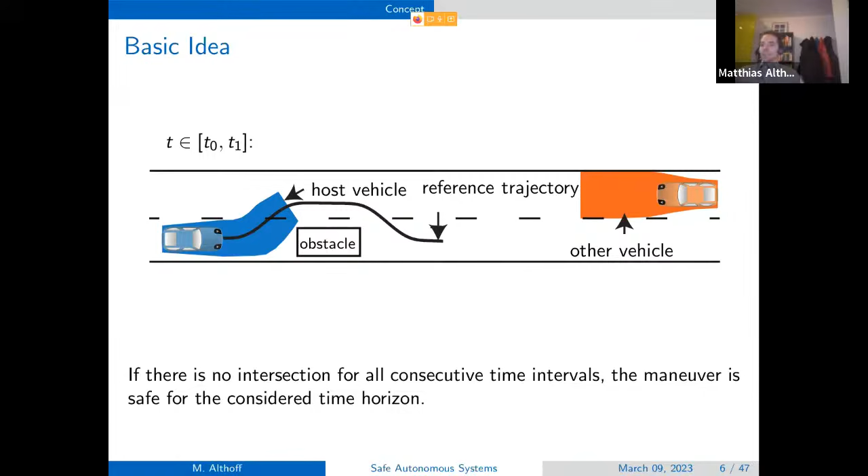So I will introduce now the basic concept, and after that I will maybe have the first round of questions, because that is something that everybody should understand, this underlying principle of this talk. So one principle is that we don't look at single executions of systems, but we look at sets of possible executions. So for the ego vehicle and other objects around the ego vehicle or ego system, we compute all possible solutions that are bounded by sets. And if these sets do not intersect, we for sure can verify that there will be no collision.

We can also use set-based methods to verify more complicated specifications, such as traffic rules that say you cannot drive over red lights, that you have to respect, that you have to yield to other traffic participants, or that you have to keep a safe distance.

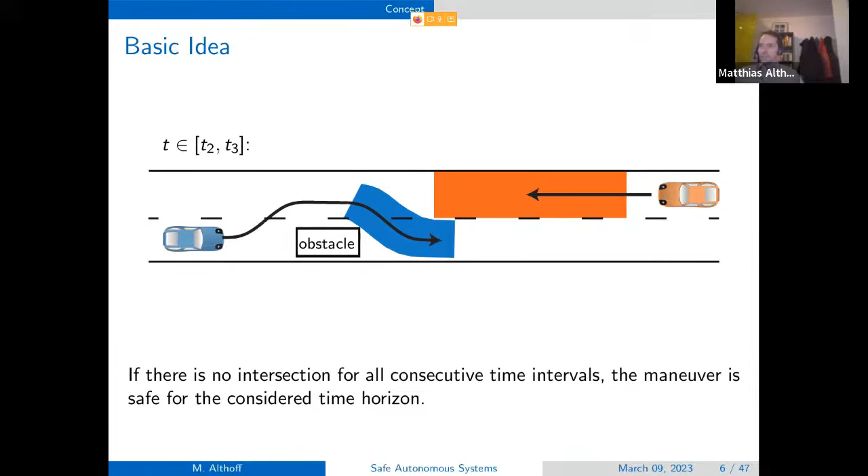The question now is, how do we combine this with some motion planning module? This motion planner can be an AI system or a classical optimization system, it doesn't matter. It produces this blue trajectory, and before we compute this optimal trajectory, we often assume a certain behavior of other traffic participants. In this case, we assume the other vehicle stays on its lane and keeps its velocity.

However, in contrast to other approaches, we also compute the reachable set of other traffic participants, which includes all possible behaviors. And we compute this failsafe trajectory B, which brings the system into a state where it can stay indefinitely without causing any accident.

In the next step, the other traffic participant does something unexpected, but we know, because it can only produce behaviors within the reachable set, that the previous failsafe maneuver is still safe. So we will always be safe.

Nevertheless, we try to find a new intended plan A prime with a new failsafe maneuver B prime, and try to verify it before it branches off the failsafe trajectory, so that we don't have to engage it. It could be that we engage the failsafe trajectory, but then we don't have to execute it until the very end, so that we continue our movement as soon as possible.

One more word regarding the safe state. The state should be safe in the sense that you can stay in it for all time. In a road vehicle, that could be stopping. Of course, if you're on a highway, stopping is not always safe.

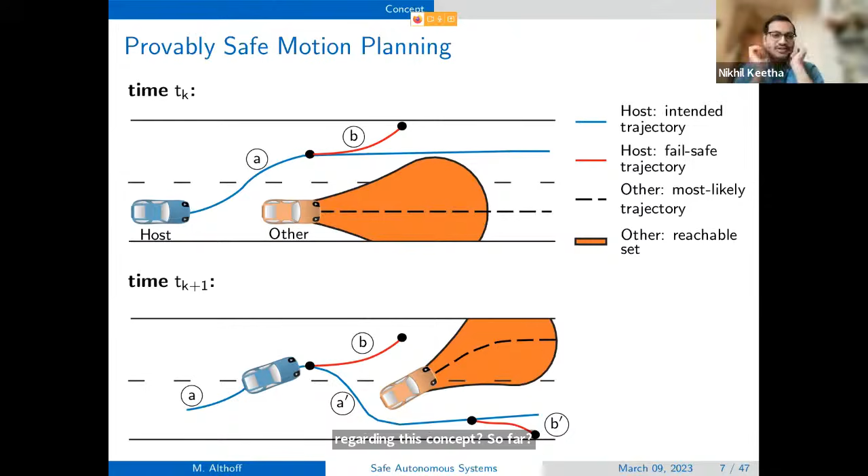I think we can do questions at the end. Okay, okay, good. Yep. Yeah, then I'll just continue.

One thing I haven't shown on that slide is that we don't assume we follow planned trajectories perfectly, as shown in this figure. We also consider sensor noise, disturbances, and unmodeled dynamics, and of course the trajectory tracking control of the ego system, which doesn't perfectly follow a given path or trajectory.

But I didn't want to squeeze it into the other figure. This is something we additionally do.

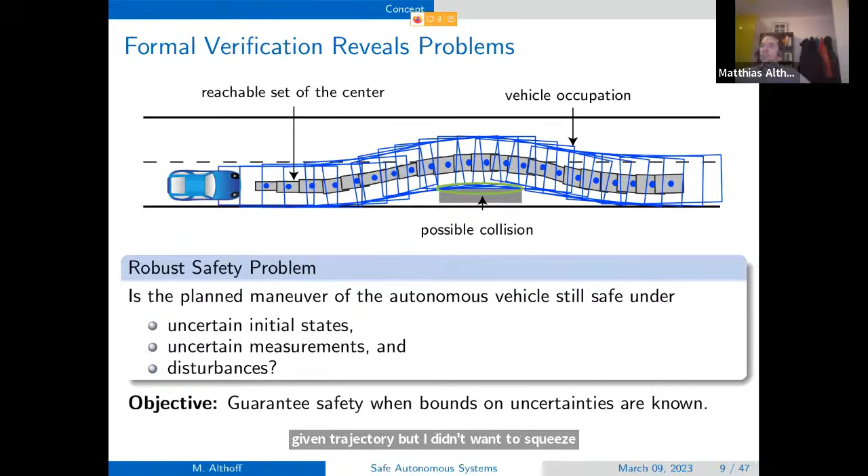And also, we don't only use this for autonomous driving, we also use this for safe human-robot coexistence. So there will be a video at the end of the talk showing this other application.

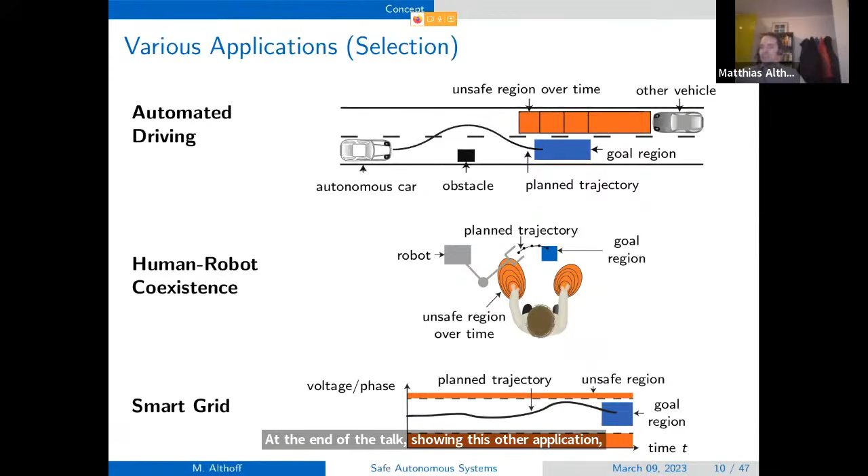And we also use it for energy systems to ensure that despite the uncertainty in energy production of renewables, we meet voltage, frequency, and phase limits in the grid.

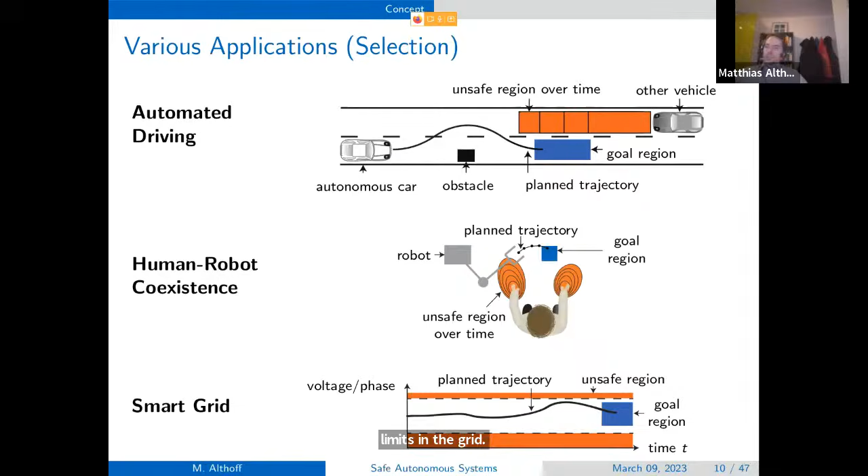We are also planning to use formal methods for quantum computing, but that's so fresh I have no results on that yet. The approach is applicable to many application areas.

This slide is there because there's always a question: why don't you use probabilistic methods? So I always show that we also used that in the past. It doesn't mean that probabilistic methods are bad. They just have advantages and disadvantages, and the set-based methods are less researched.

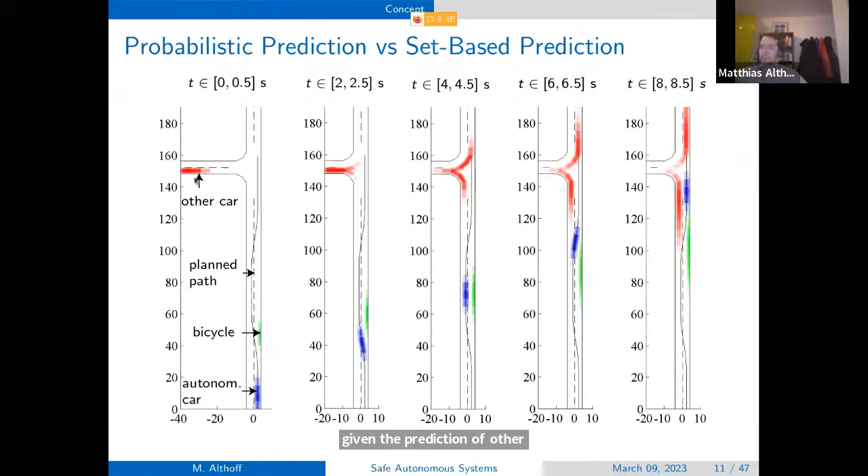Here, this is a slide from my PhD thesis where we computed the future collision probabilities of an autonomous vehicle when it follows certain trajectories, given the prediction of other traffic participants like this bicyclist here or this other vehicle. Then you get these probabilities over time showing when an accident might happen.

So that's good for threat assessment and for guiding long-term planning. However, it's very bad for providing accountability.

In an autonomous vehicle, there will be components from different suppliers, like perception systems or actuators and so on. And every system has certain issues. With set-based methods, you can have these contracts and say, okay, the sensor system has to have at least this accuracy, and then maybe the motion planner has to have at least this accuracy, and so on.

If you have set-based methods, you can always detect which module didn't provide the promised accuracy. In stochastic methods, this would be blurred.

The rarity of fatal accidents, fatal accidents are very rare. You have around 20 deaths per 10 to the 9 miles in the US. This translates to a probability of something in the range of 10 to the -9 for a prediction horizon of 0.2 miles, which is kind of the sensor range of a good autonomous vehicle. And even if you accumulate rounding errors, you often have these kinds of floating point errors. So it's very, very difficult for probabilistic methods to get the accuracy needed for safety verification.

That's why we want to use set-based methods, because we also want to ensure that the system is provably safe, which would provide the maximum confidence for the passengers of this vehicle. And we believe that this is also viable, and as you can see later on in the videos, we already did some test drives using these set-based techniques.

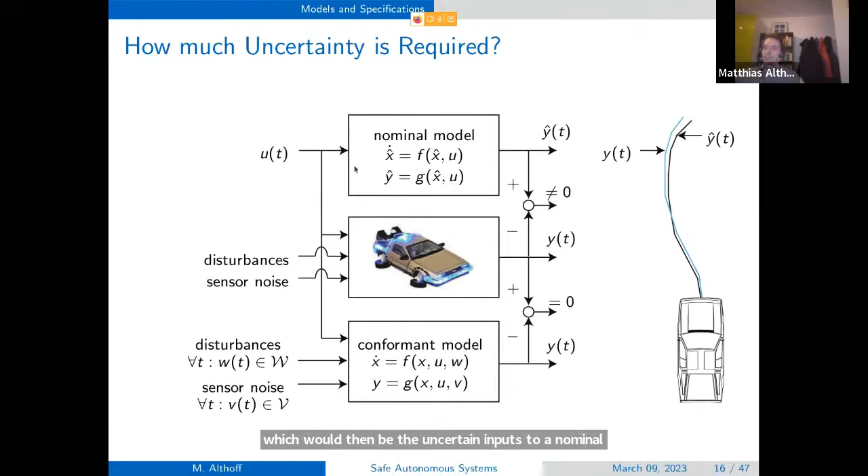Here you see some data from real test drives. These are the inputs to the vehicle. In this case, we had acceleration and curvature. Curvature could be used, or you can use a steering angle, that's essentially convertible one into the other. And then you see here some disturbances that we injected so that the behavior matches up to a certain epsilon bound. Of course, the tighter the epsilon bound, the more accurate, but then the longer the optimization takes.

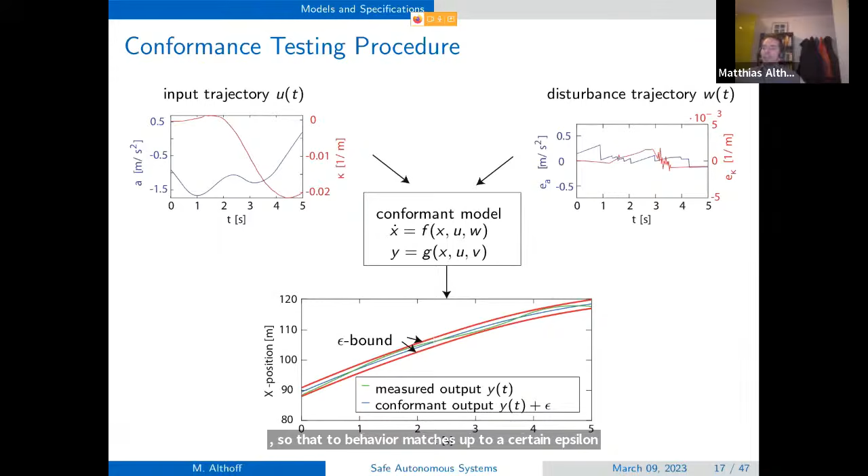So that's one method, but we have several to have these high confidence models. Now let's talk a little bit about formal specifications. For instance, for human robot coexistence, we use some ISO norms.

For smart grids, we use some grid codes, and for autonomous driving, we use traffic rules. So first we have to make them more concrete, because as a human driver, you should maybe have a sufficient safe distance and so on.

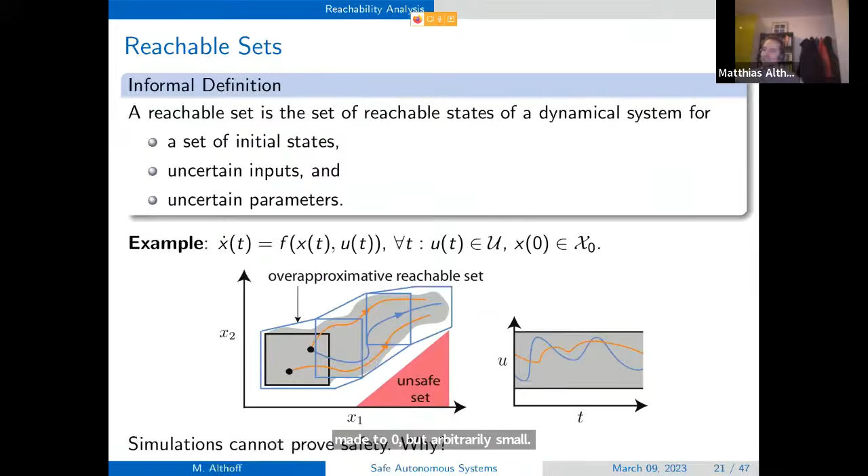If you have a linear differential equation, like x dot equals ax plus u of t, then computing the reachable set is particularly easy. You just have to compute first the homogeneous solution, where you multiply the exponential matrix with the set of initial states, and then you add the input solution.

This is the convolution integral for those who had systems and signals, for fixed input. So we first look at the fixed input and then the deviation of this fixed input in the second step.

Now in the second step, we compute the convex hull to approximate all solutions in between two time points. And then we enlarge this convex hull to also account for uncertain inputs, and for the fact that the trajectories have some curvature as they go from one point in time to the next, which we ignored in step two. And then this repeats over and over again.

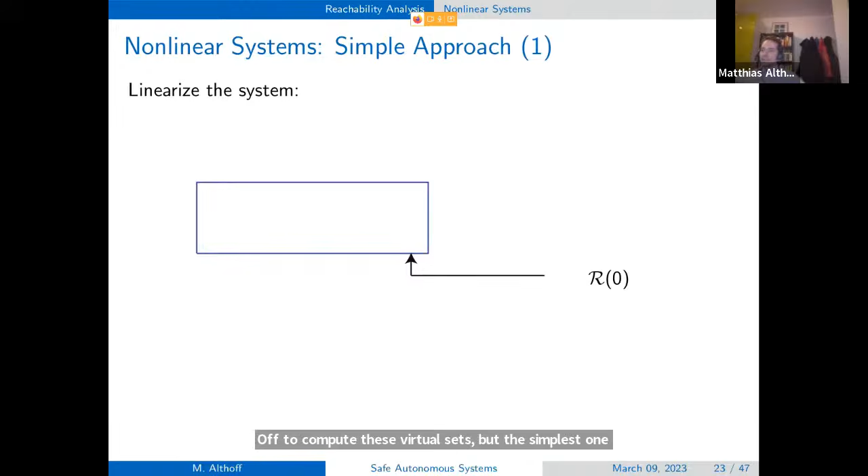For nonlinear systems, of course, we need some extra steps. There exist many different approaches in our tool CORA to compute these reachable sets, but the simplest one is as follows. We start with the initial set, then we compute the set of the linearized system dynamics for one time step using the approach shown on the previous slide.

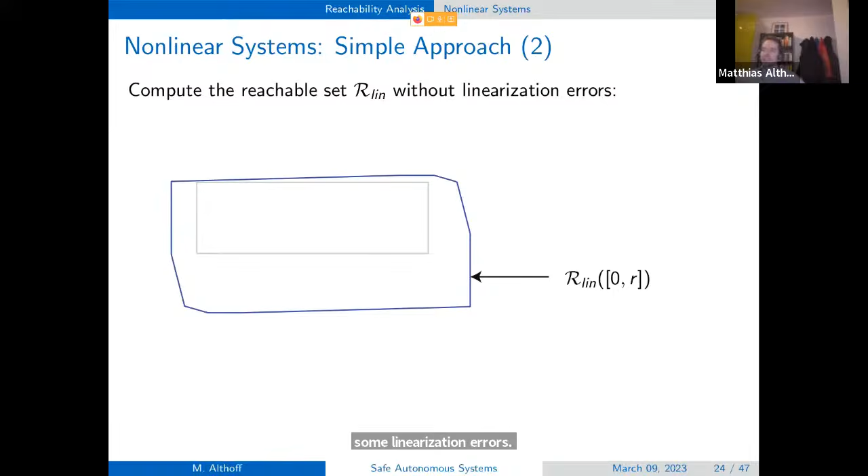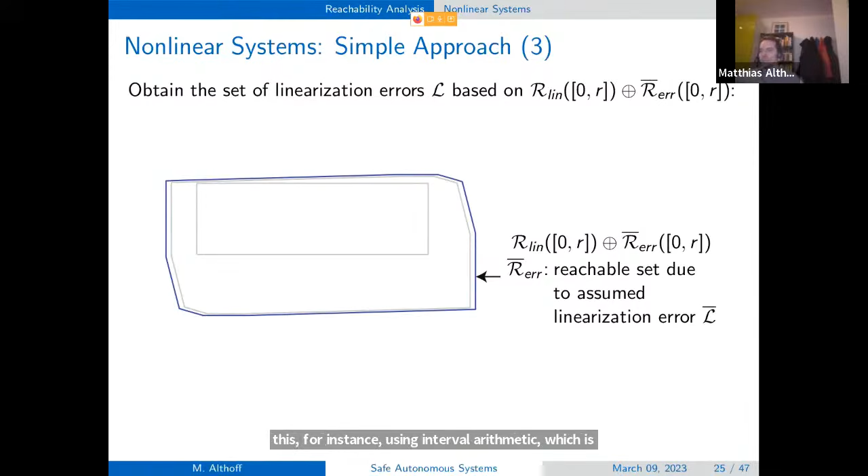But then, of course, we ignored the fact that we have some linearization errors. So we simply guess the set of the linearization errors, inflate this reachable set, and then check whether this guess was okay or not. You can check this, for instance, using interval arithmetic, which is a formal method that scales very well. If you're interested, I can tell you more about this later on.

And then usually in one or two steps, this converges. Then you do the same thing for the next time interval and so on. And then you get this reachable tube in which all the solutions have to lie.

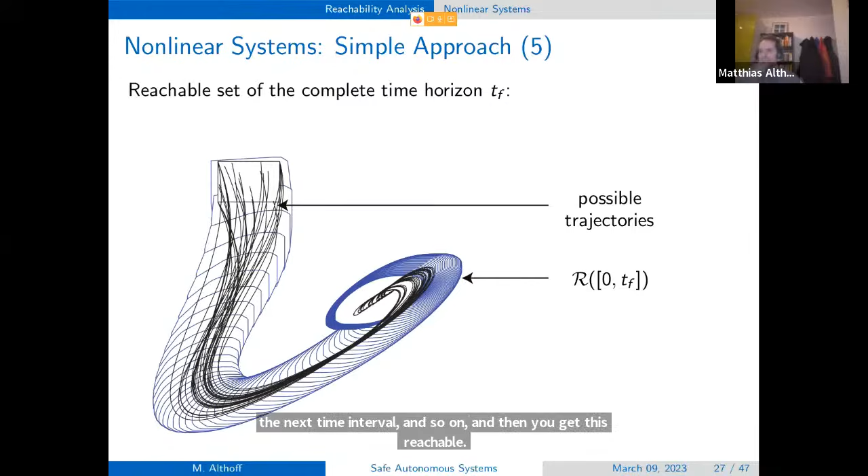And this scales fairly well. For nonlinear systems, this scales with n to the power of 3, where n is the system dimension. Previous approaches had exponential scalability, so we can also compute systems with 100 or 500 continuous state variables.

Okay, so now we can compute these reachable sets. We also checked whether the results are conformant, so whether actual behavior lies within these reachable sets. One of the earlier tests was that we used this...

8,543 vehicles from a data set in the US. Now we have also our own data set with even more vehicles, but this was the first check. And we could see that all the predicted behaviors lie in our reachable set. That, of course, is trivial because you can always make this very conservative, but we also showed that this is not that conservative.

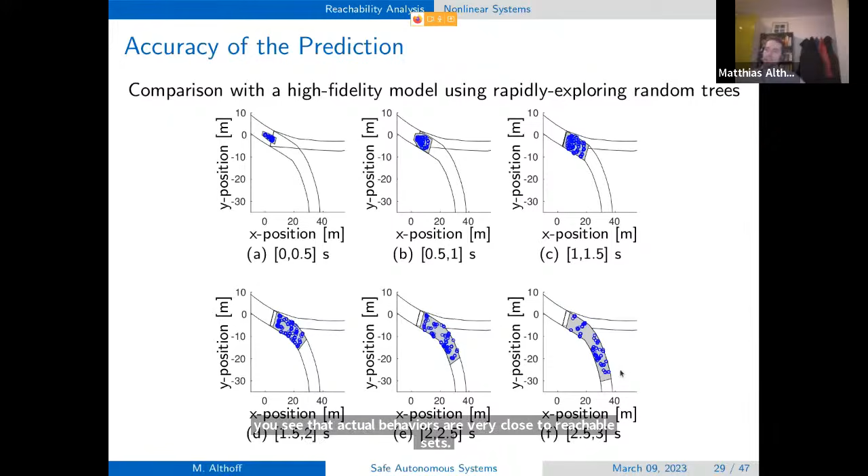Of course, we also have to talk about computational complexity, because you don't only have one or two other traffic participants, but sometimes tens of others, or even up to 100 traffic participants that are relevant.

So what we then do is we don't compute the reachable set of all traffic participants, and we don't compute it until the very end. One thing we do is we have several abstractions of our model, and we compute the reachable set of the first abstraction, second abstraction, third abstraction, then intersect these reachable sets, and then we get the reachable set of a traffic participant.

And then we see whether it intersects with the ego vehicle or not. But a simple trick, of course, is that we only compute up to the abstraction that already shows that there is no intersection, and then we don't have to compute further abstractions.

That's one trick. And the other trick is that we can reuse reachable sets, because reachable sets are always true - yes, they're true for all times. So if you want to know possible behaviors for the next time step, it suffices to only compute the reachable set of the next time interval.

The only thing is, if you don't start from scratch and only reuse previous reachable sets, then the reachable set will inflate more than it should because you don't consider the new measurements of the system. However, if right now you need a solution and don't have much time, then you can do this trick. And then if you have more time again, you can refresh the computation.

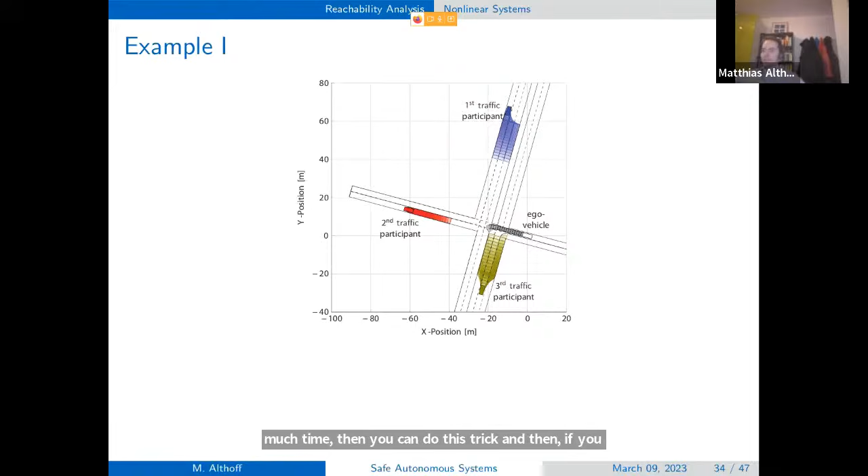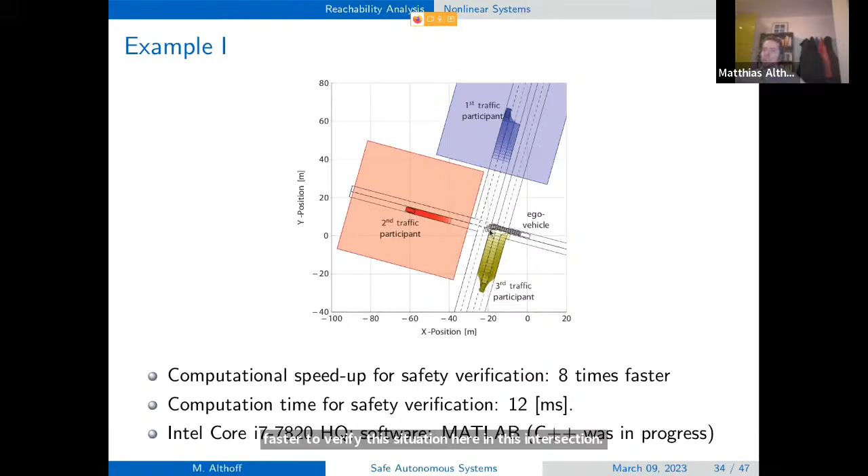So these are some early measurements. Now we have a faster C++ implementation. Sorry, I haven't updated these slides yet. But you see that with this online approach, you would be 8 times faster to verify this situation here in this intersection. So then it only took 12 milliseconds in MATLAB; in C++ it's even faster. And verifying this situation here, for instance, was 47 times faster, and then only required 3 milliseconds, and so on. So you will also see in the videos that we can compute these reachable sets fairly quickly in real time.

We also use reachable sets for motion planning, not only to verify motion plans. For instance, if you want to plan something in collaboration with other agents, then you have the issue that if each agent has m plans, then you have m to the n power possible combinations. And to avoid this exponential blow-up, we compute the reachable sets and then negotiate the intersections of the reachable sets using some auctioning mechanisms which have polynomial complexity, so that each agent gets its own bubble, and then you can plan within each bubble independently. So then you have just n times m possible plans.

Good. So all that you've seen is implemented in our tool CORA, which is freely available. It's a general-purpose tool for formally verifying hybrid systems, so mixed discrete-continuous systems. And with CORA, we also participate each year in the ARCH competition, which is a competition for formal verification of hybrid systems.

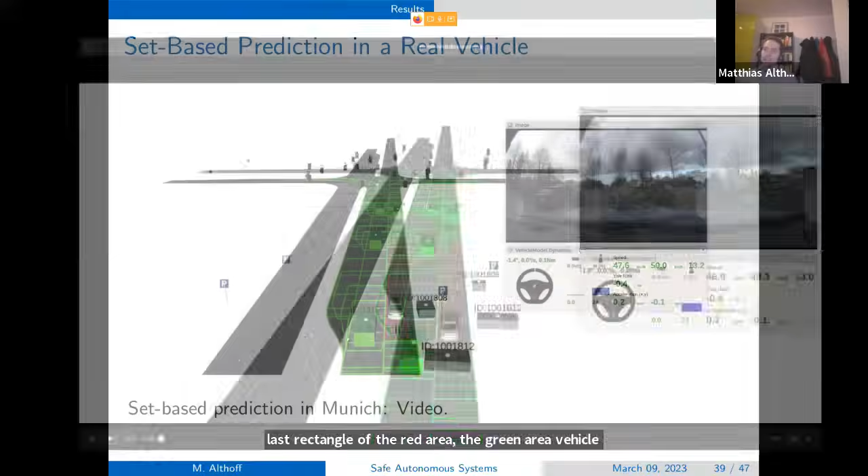So here you see set-based prediction of surrounding traffic participants recorded from a real test drive. You see here on the left the reachable set of all times. Otherwise, you had a lot of flickering, and because of that, it seems like it's not safe because the red area intersects the green area. But by the time, for instance, the ego vehicle is at the last rectangle of the red area, the green area vehicle is already somewhere else. So you have to know that if you would plot it for different time steps, there would be no intersection.

So here's a situation where you see the whole pipeline. This is an intersection in Munich, and you see first how we predict other traffic participants using reachable sets. Then you see how we verify the fail-safe trajectory, and then how we continue with the intended plan. The black line shows the intended plan, the red line is the fail-safe plan, and we verify whether it's safe to start with the intended plan, then execute the fail-safe plan, and that's safe.

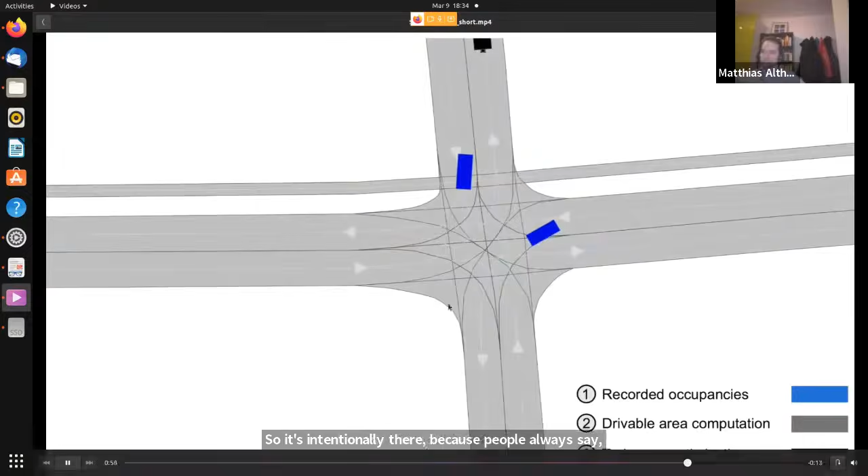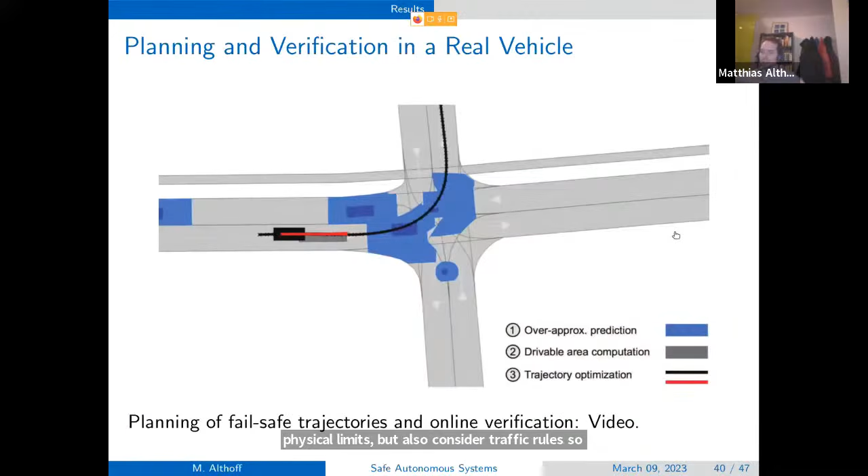And then in the second part of the video, I will just show you the planning without the verification part. And you will see that it's not very conservative how the vehicle moves. So we let this bicyclist through, but then we take the left turn before this other traffic participant. It's quite tight, but it was formally correct. It's intentionally there because people always say, if you compute with sets, then the vehicle would never be able to move. But we haven't really encountered this problem. Of course, we don't only consider the physical limits, but also traffic rules, so that the results we obtain are not too conservative.

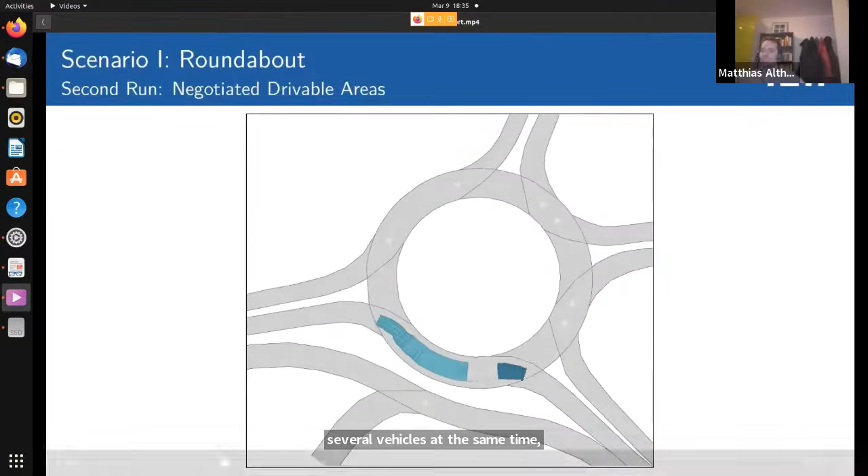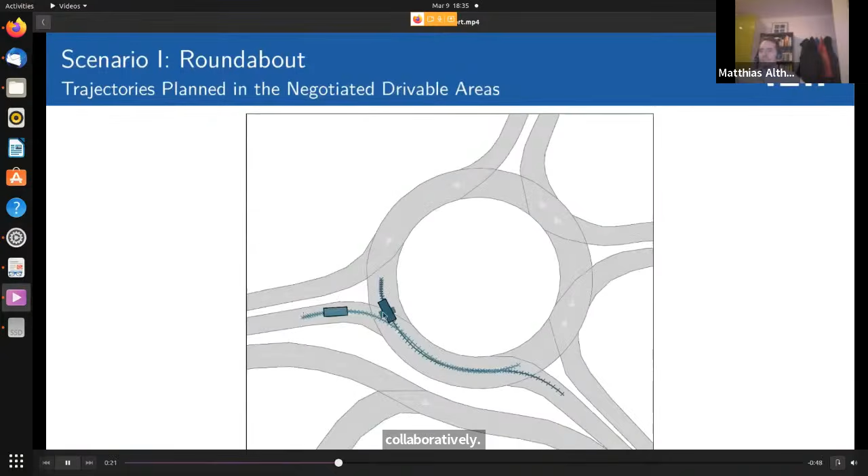This shows how we make use of reachable sets for collaborative driving, where we plan the movement of several vehicles at the same time, because of course you have more efficient traffic and safety improvements if you do this collaboratively. So here you see the solution after computing the individual reachable sets and negotiating the reachable sets.

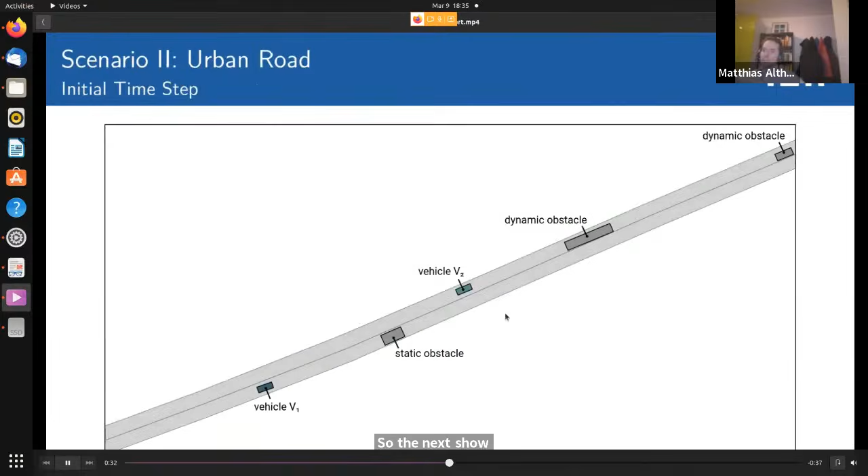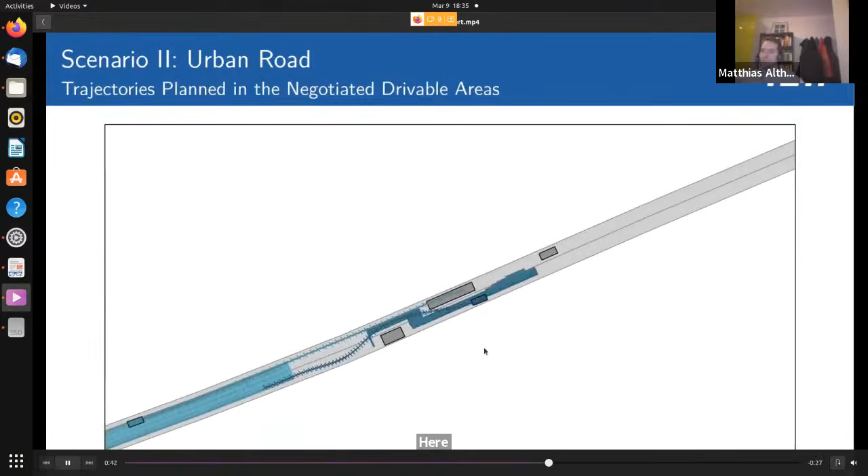So the next scene shows a more complicated scene where we want to pass a static obstacle, and then we have oncoming traffic. Again, here we computed the motion plan together with the reachable set to save computation time.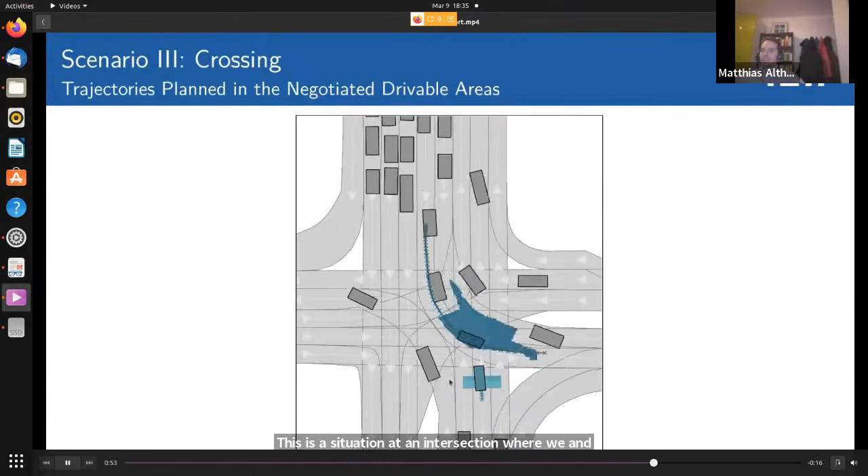And this is a situation at an intersection where we checked if we remove traffic lights, whether we can efficiently negotiate behavior. And then this is a situation with 4 vehicles on the highway. And also that was where we were able to compute this in real time.

We also apply our formal methods for safe reinforcement learning. So without our method, during reinforcement learning, you would cause a lot of accidents, as you see here. In a simulation, of course, this is not an issue, but you also want to perform reinforcement learning on real systems so that you don't have the sim to reality gap.

And then you can use the safety layer, which is switched on now, to avoid collisions. We have also seen that in simulation, you converge faster to good solutions because the reinforcement learning agent doesn't explore areas of which we already know that they are not safe.

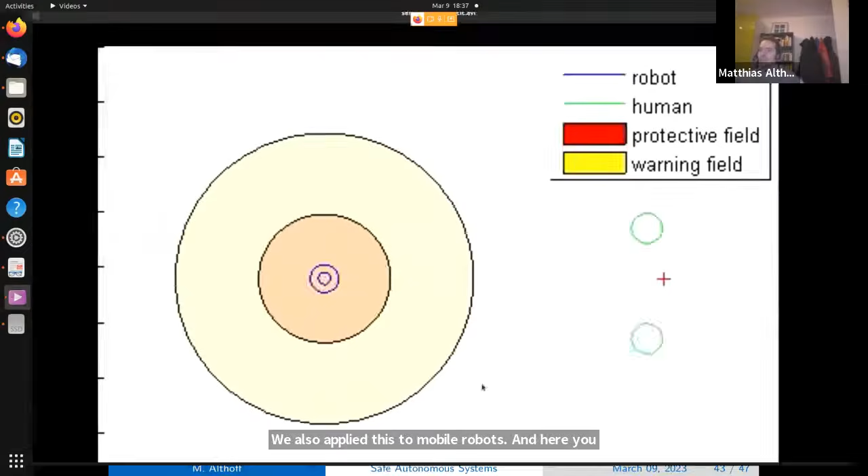We also applied this to mobile robots. Here you see the situation required by the ISO norm. This is a situation where you have 2 pedestrians, the green circles, approaching this robot, which is indicated by this blue circle. And when a pedestrian or human is in this light area, the robot has to slow down. And if it's in the dark area, it has to completely stop. So in this case, the robot has to completely stop.

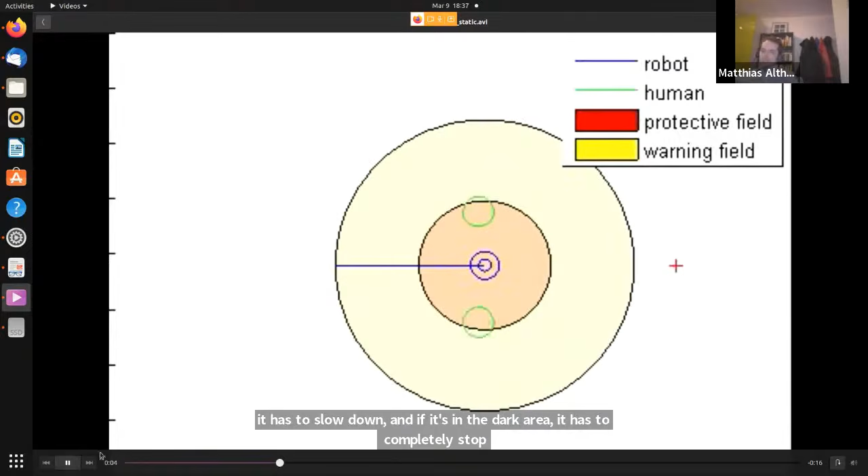And if you use our online verification, the robot doesn't have to stop because when it slows down, the time until it comes to stop is reduced. And then the prediction horizon for the other traffic participants is reduced. And then the robot essentially slips through and doesn't have to stop while preserving safety.

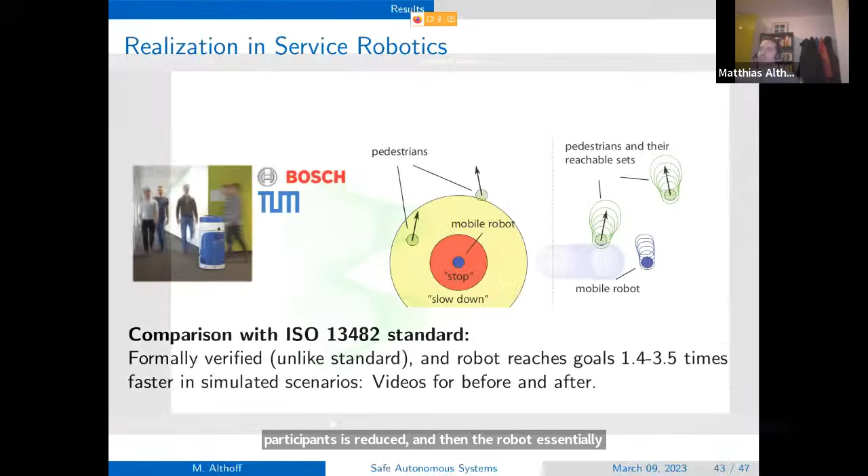We also tested this in a situation where vehicles should be shipped from a factory, let's say to a ship or to a train. So this is not really autonomous driving, it's just autonomous driving on factory ground, where the vehicle is basically receiving the sensor information from infrastructure and the commands via cellular network. But there also our safety method has been used.

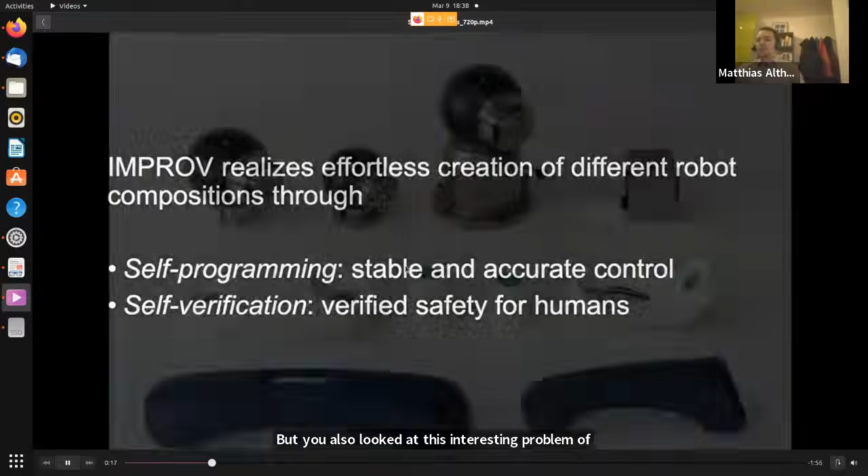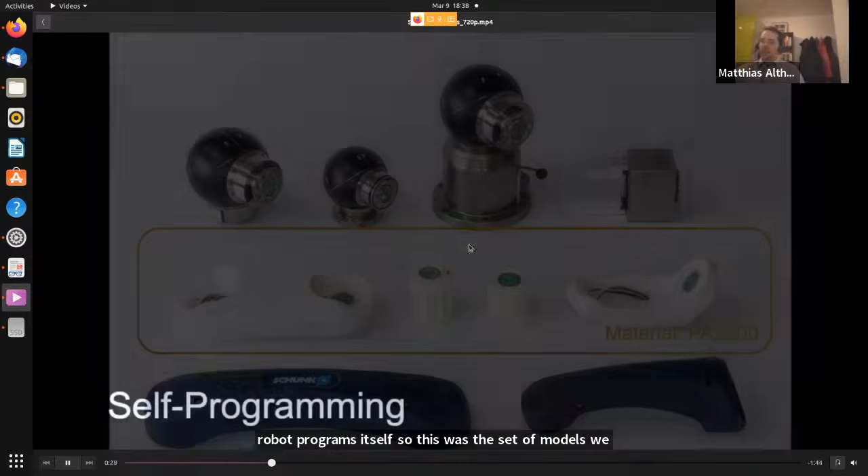And we also use this for modular robots. So there we don't only consider the safety issue, but we also looked at this interesting problem of creating robots out of fixed modules in a way that the assembled robot programs itself. So this was the set of modules we used, and in each module we had information about its kinematics, its dynamics, and geometry.

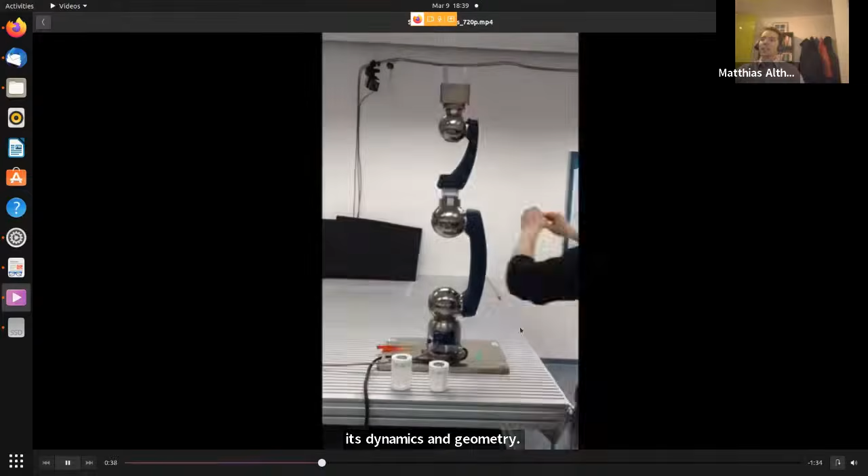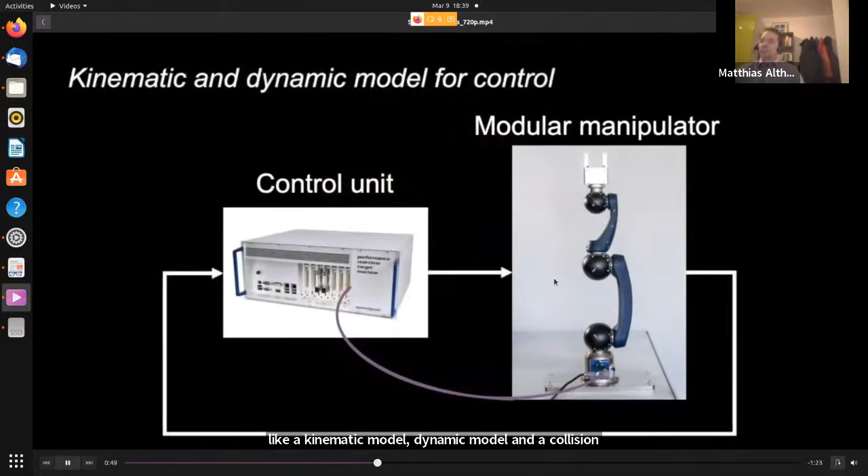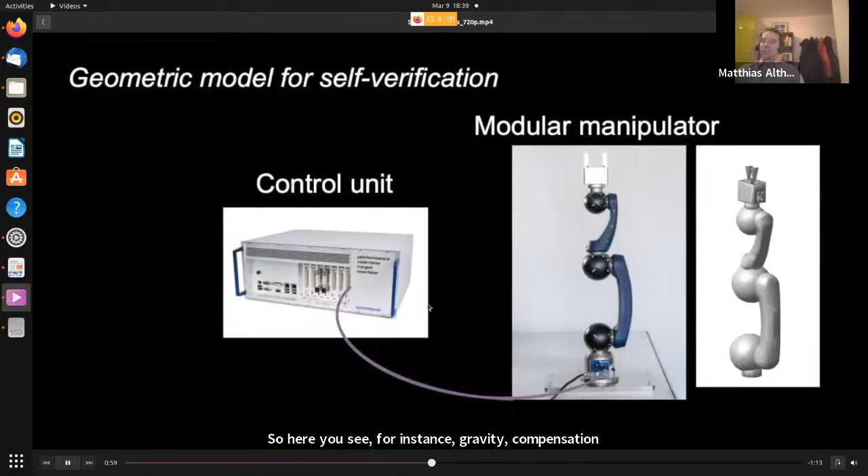And once you assemble the robot, this information is collected, and then we build a kinematic model, a dynamic model, and a collision model. And the robot is usable out of the box because of the self-programming capability. So here you see, for instance, gravity compensation. And because we use online verification, no matter how you assemble the robot, it will always be safe.

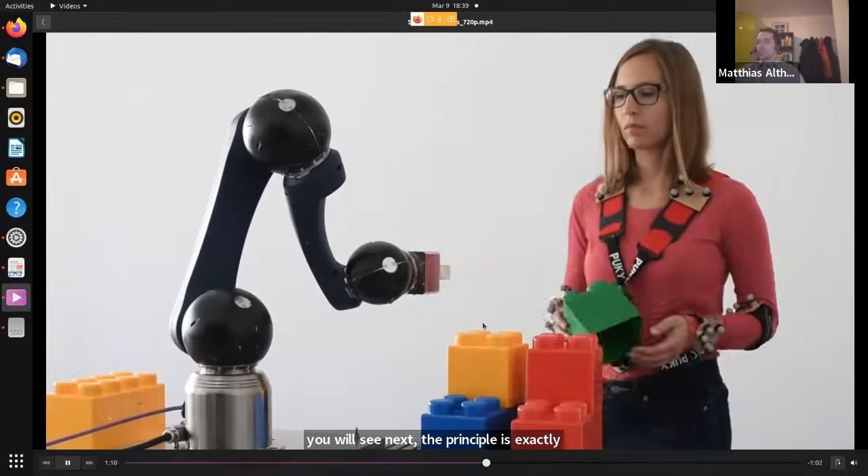And as you will see next, the principle is exactly as for autonomous vehicles. The only difference is now that the reachable set is computed of the human body instead of other traffic participants. But also here we then have this fail-safe trajectory. So here you see how this runs in real time. So here we verify that the robot always stops before the human touches it.

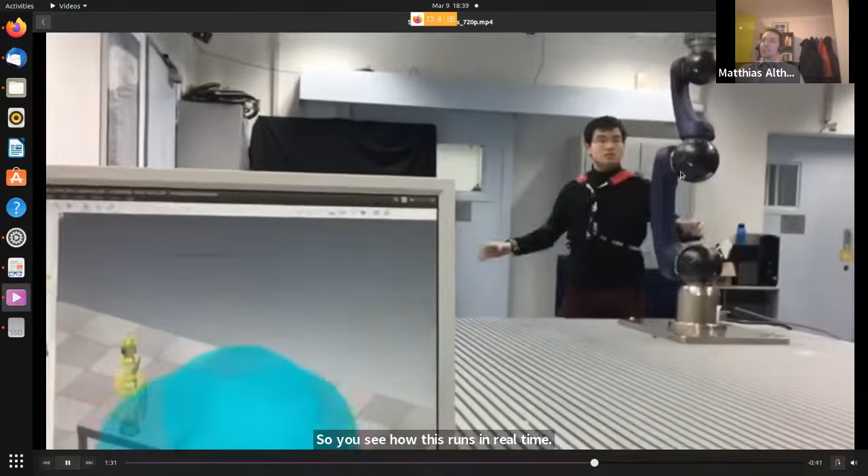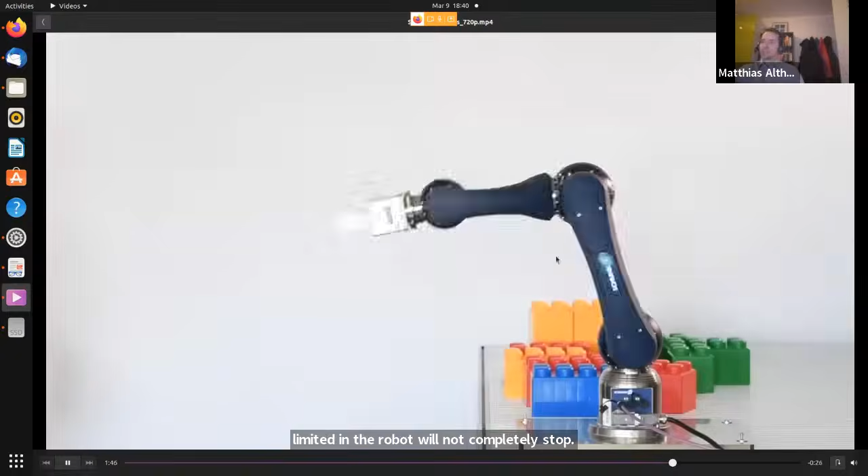We also have some variants where the force is limited and the robot would not completely stop. So here you see some reachable set of 1 arm, for instance. So this is the situation with the 6 degree of freedom robot. And if you reassemble it to, for instance, an 8 degree of freedom robot, as shown next, then this is also safe out of the box without any reprogramming.

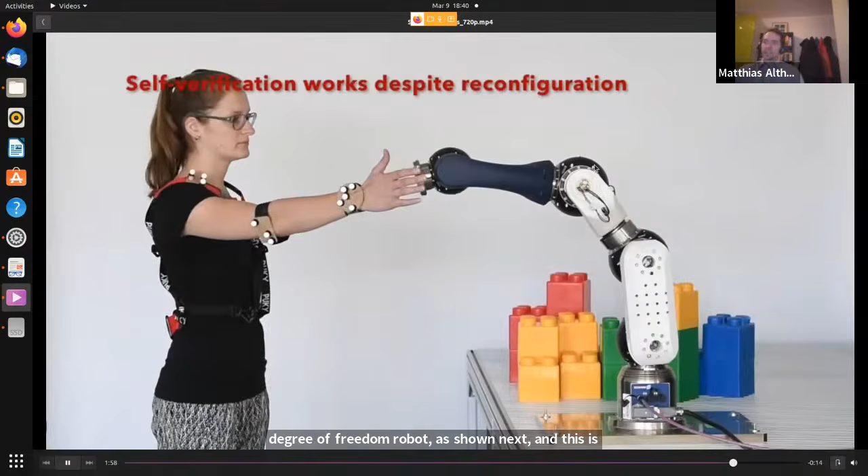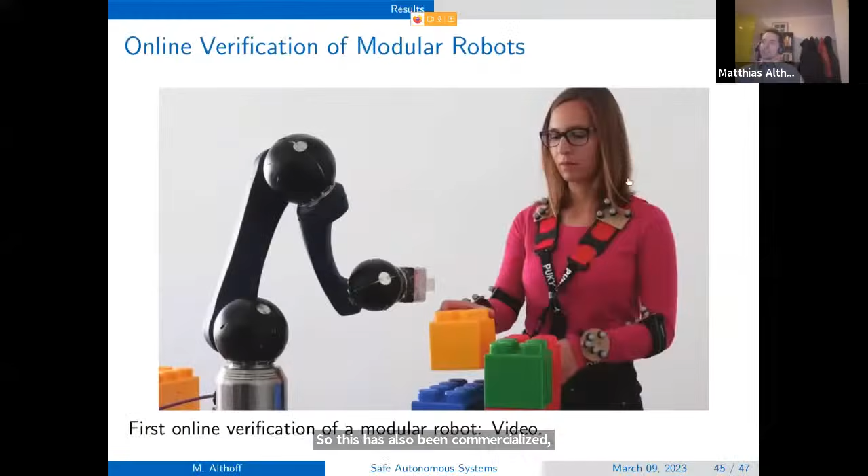So this has also been commercialized. So we have this startup called Robco. I can also show you the website later. Initially, it was called Kea Robotics, but then the vehicle manufacturer Kia, K-I-A, said, no, that's not okay.

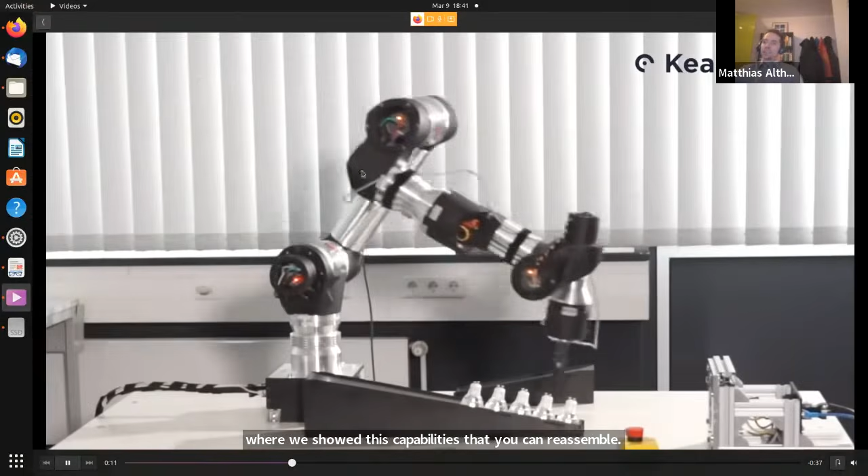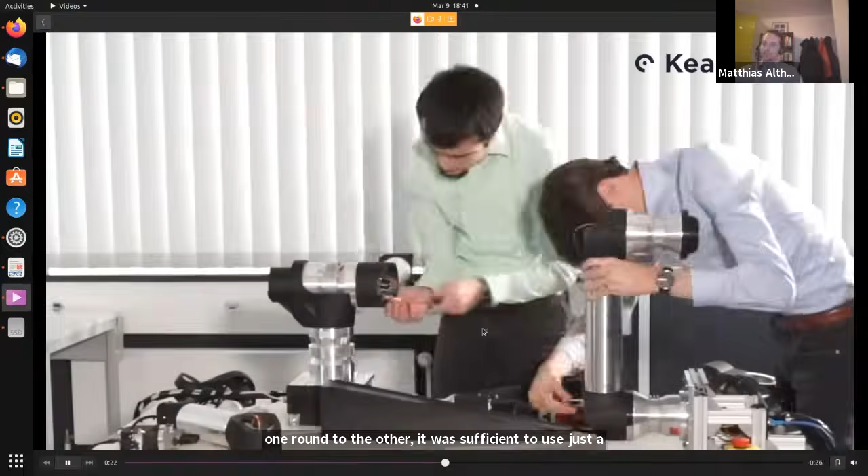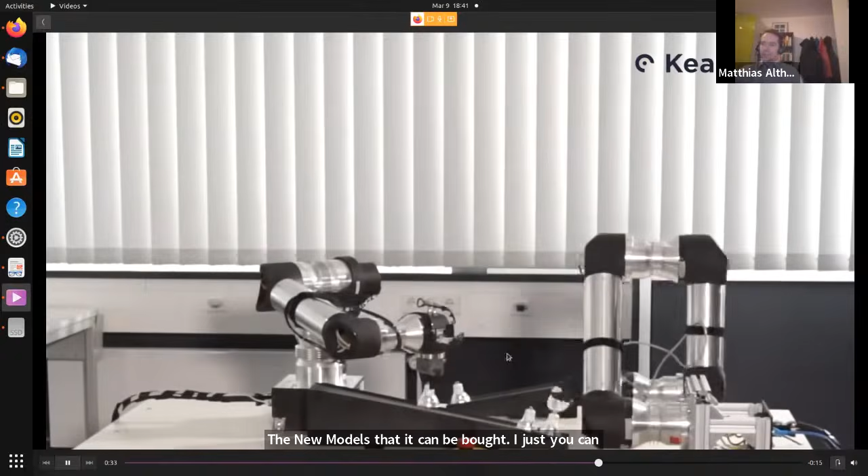This was an early prototype where we showed these capabilities that you can reassemble the robot. So in this case, we made 2 robots out of 1. This was a 6 degree of freedom robot, but because of the rotational symmetry of these lamps that we moved from one ramp to the other, it was sufficient to use just a 3 degree of freedom robot. Here we still had to use screwdrivers. The new models that can be bought, you can just click them on essentially. And yeah, it's usable out of the box.

Good. Then I already conclude so that we have enough time for discussion. So I've shown you how to compute all possible behaviors of dynamical systems, where we considered uncertain initial states, disturbances, and parameters. By assuming that all behaviors of the real systems are captured by adding uncertainty, we can prove safety also for real systems. And the computation of the systems that we already realized is faster than the maneuver time. So we have real-time capabilities.

And even though in some cases it might not be real-time capable, we always have the fail-safe solution. So we don't really have to prove real-time capabilities for certification. And we have this intrinsic safety property that if you forget assumptions like certain traffic rules, the reachable set of other traffic participants would be overly large, which would just result in more cautious behavior, but never in an accident.

However, accidents remain possible, but then we will not cause these accidents. An example would be that we are trapped in a traffic jam and somebody rear-ends our vehicle. Then, of course, we have no way to avoid this, but then it's not our fault.

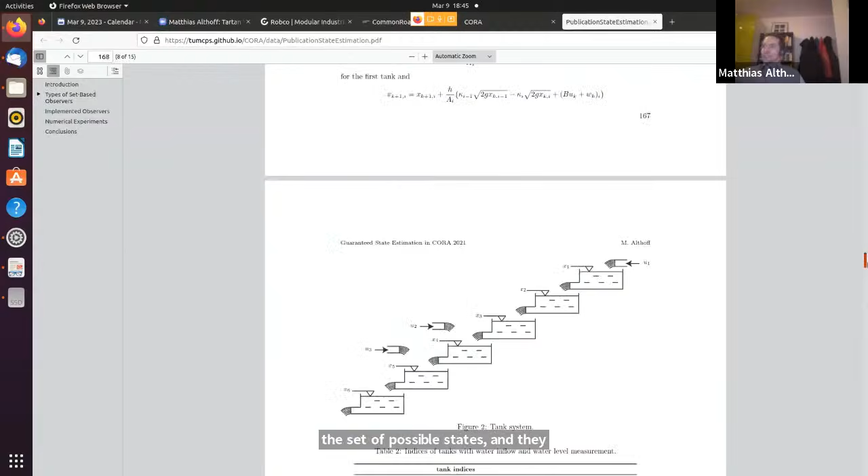Yeah. You can also use set-based observers instead of Kalman filters. So we have this paper, for instance, as an example, on guaranteed state estimation. And there you compute the set of possible states. And they're also quite efficient nowadays. If you look at the computation time, this was a 30-tank system, so it has more than 30 state variables, and these are the computation times in milliseconds. Some approaches require less than a millisecond. You can run it at 1 kilohertz, and that is an alternative.

So we also want to do more on new methods for sensor data fusion using set-based methods. This is a rather new result, but for sensor data fusion, we don't have a provably correct method yet. And then of course you can say, yeah, but what about image recognition when you have a neural network?

So I have one PhD student where we could verify computer vision problems for 50 by 50 pixel videos if you have some noise in the data, but not for a high-resolution camera. So there are still some issues to be solved. But we're trying to work our way up the pipeline to the perception.

But you're right. In some cases you have only probabilistic information, and then you have to use, let's say, if you assume Gaussian noise, the 3 sigma confidence interval or so, and then you know, from here on I have an assumption, so there's still a certain probability that something can go wrong, but after that everything is kind of safe, and you don't have to test at least the motion planner, but only maybe the perception system, which is also good, and maybe also not the Kalman filter, because you already know that if you use a set-based observer, then that also produces correct results.